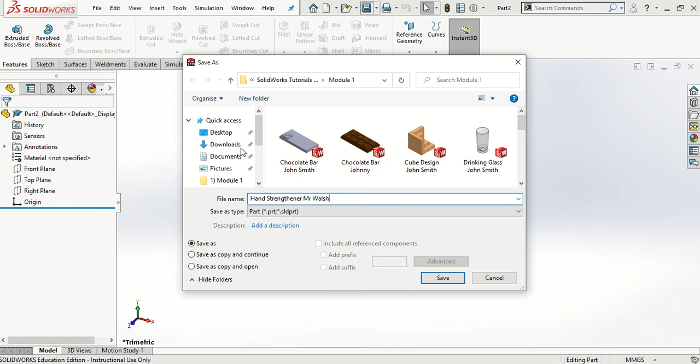We will begin by opening a new part and saving as normal. We're going to call it hand strengthener, and your name. Make sure you're saving it into your folder that you can find it easily again.

First of all, we're going to open up a sketch on the front plane. All we're going to do is draw a normal line starting at the origin off to the right hand side and press escape.

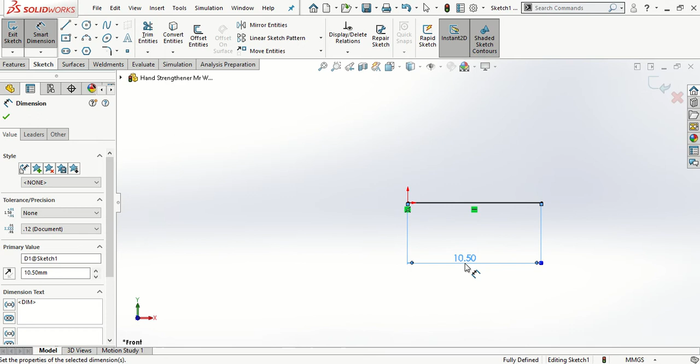We're going to set a dimension on this to 10.5. Then come up here and hit exit sketch. Okay, and then just press escape and that'll knock it off.

See the way the blue is highlighted here and here. If you press escape, that gets rid of that.

We're going to open up a new sketch. It's still going to be on the front plane, so we're going to come down to this arrow beside hand strengthener and hit front plane, and now we're in a sketch on the front plane again.

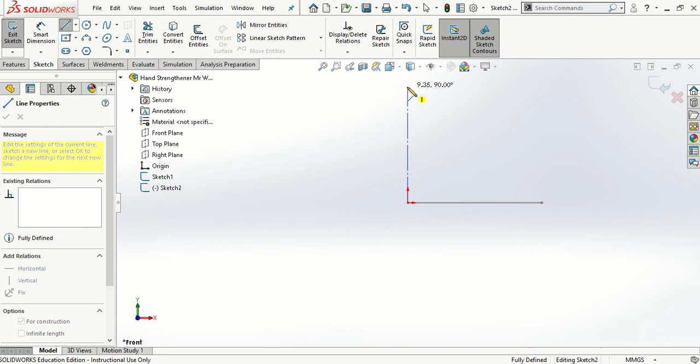We're going to get a center line this time, start it from the origin and draw it up. Somewhere along this center line, we're going to draw a normal circle.

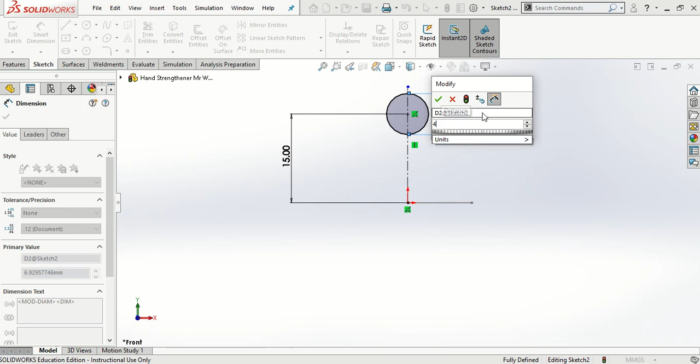We're going to dimension the center of that circle to the origin and set that to 15 mil. Also, we're going to dimension the diameter of that circle to 4 mil. Then hit the green tick over here to the right to exit our sketch, press escape again, and F to fit.

Okay, so that is our setup done. What we'll do now is introduce Swept Boss Base. So what that's going to do is create a helical spiral for us. For anyone in 5th year studying DCG, you will come across helixes and spirals at some stage throughout the first term.

Okay, so we're going to go up to Features and Swept Boss Base. So what is Swept Boss Base? It's going to allow us to create a helical spiral in our SolidWorks.

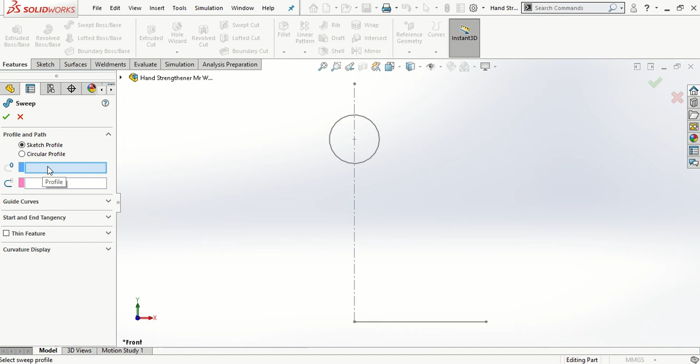So over here we have sketch profile or circular profile. We want this left at sketch profile. If we hover over this, this is our profile, so our profile is the shape we want to take. We wanted to take the shape of our circle, so I'll click on the circle.

If we hover over this, it asks for the path. The path we want to follow is this straight line.

What we need to click on next then is the arrow beside options. We want to leave it at follow path. For profile twist, we want to select specify twist value. And for twist control, we want to change it from degrees to revolutions.

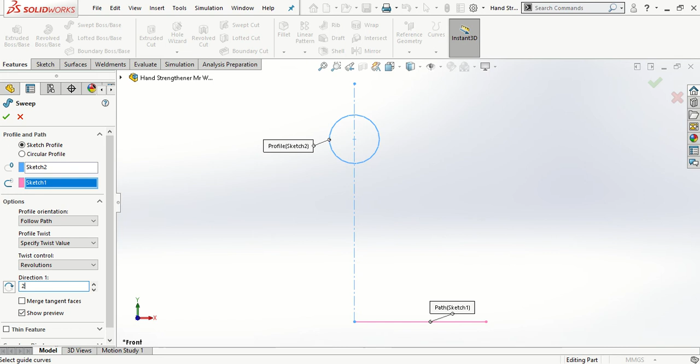Okay, so we're going to change where it says 0 to 2.45. Then click on the blank part of your screen, and you can see we get a preview of what it's going to look like. So that looks like it should, so I'm going to hit the green tick.

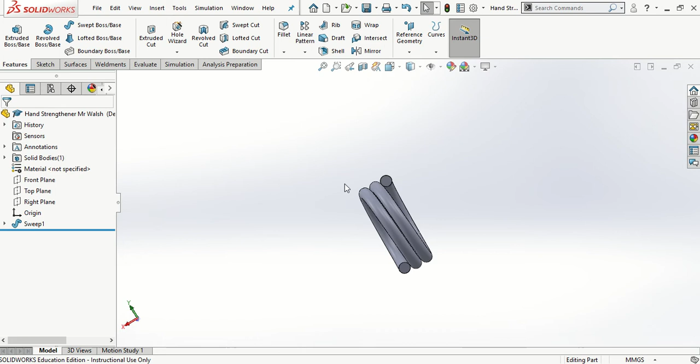Okay, so you can see now we've created a helical spiral from a sketch using Swept Boss Base. So hit save. It's a very, very useful tool for creating what looks to be very, very complicated, but that took us no length of time to do.

So I'm going to rename this sweep to helical part.

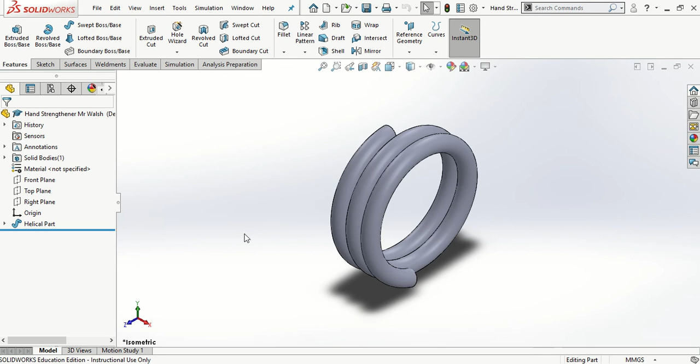So our next move, we're going to rotate around and select one of the faces. So either this face or this face, doesn't matter which one you select first. So hit that and select normal to.

We're going to go to our sketch tab and open a sketch on that face. I'm going to zoom in on it. So as it's turned blue, which is a handy thing to do, and if it's not turned blue on you, if you're after hitting escape or whatever, you can just hit on it again and it'll turn blue again.

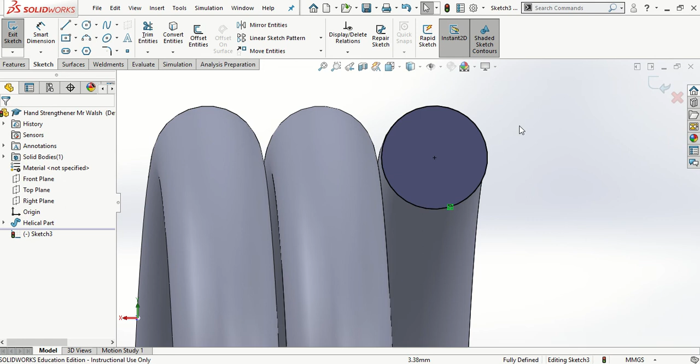So what we're going to do, instead of drawing that circle again, we can just come up here and hit convert entities, and that converts that sketch for us onto that face. Okay, so we can come along then, extrude a boss base.

We're going to set it to 22 mil, and then hit the green tick.

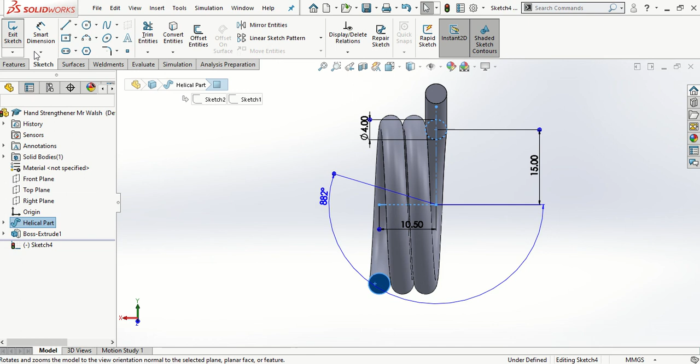Okay, and we're going to do the very same thing on the other end. Hit the face, look normal to, open up the sketch, and convert entities. We'll then go to features, extrude a boss base, 22 mil, and hit the green tick.

Okay, so both those boss extrudes we're going to rename as extension 1 and extension 2. And we'll hit save again.

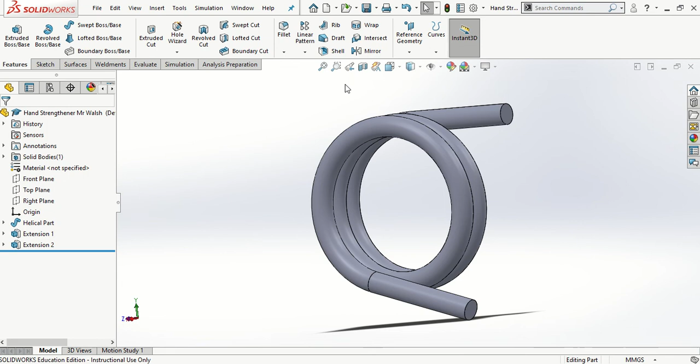So again, we're selecting one of these faces, doesn't matter which one, we're going to be doing the same thing with both of them. Look normal too, zoom in, and open up your sketch.

And what we're going to do this time is select circle, come until we get the center. You see this cross appear when you get to the center. Click once, draw out our circle, and click again.

We're going to dimension that circle to 12 mil.

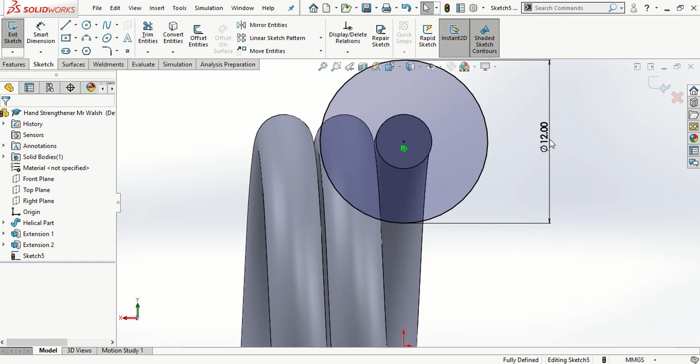We're going to come along then, go to features, extrude a boss base, and extrude that 90 millimeters. So that's what it'll look like, and hit the green tick.

And we'll repeat the exact same procedure on this face. So we're going to look normal to, zoom in, create a new sketch, draw our circle starting at the center of this face.

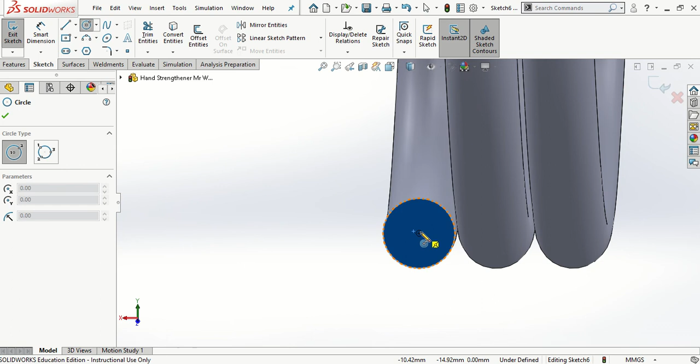Dimension it to 12 mil, and then extrude it to 90 mil.

Okay, so starting to take shape now. And I'm going to rename both of those. One is going to be handle 1, the other is going to be handle 2.

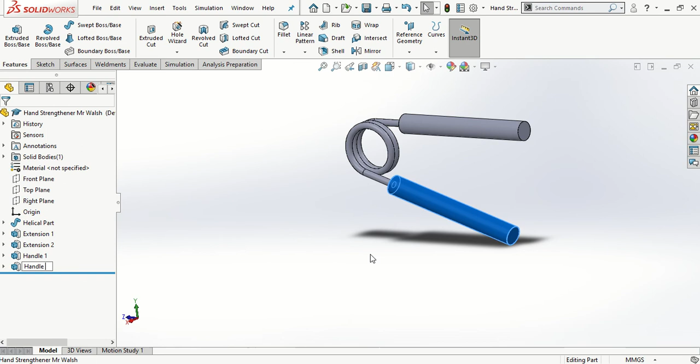So what we're going to do at the end of both of these faces is put a feature on it called a dome. What that does is it slightly rounds the end of the object. Okay, you might have it appearing up here.

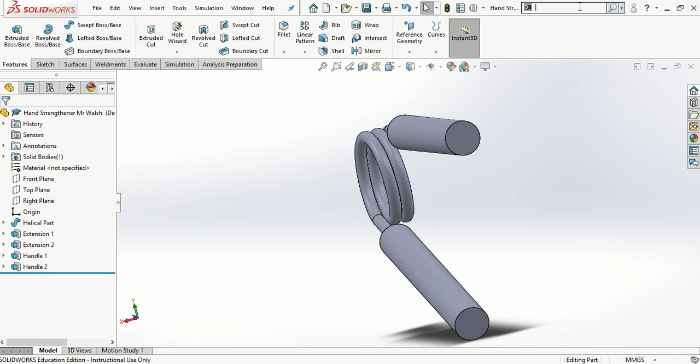If you look in your features tab, click features and have a look here, you might have dome there. But if you're like me and you don't, come up here to where it says search commands. Type in dome, and it'll appear for us.

So if you click that, for the parameters, we're just going to click both faces. Generally it's a bit slow, so you can see that blue wheel spinning around, give it some time. It didn't select it for me, so I'll have to wait. Oh, eventually it picked it. It can be quite slow depending on how quick your computer is.

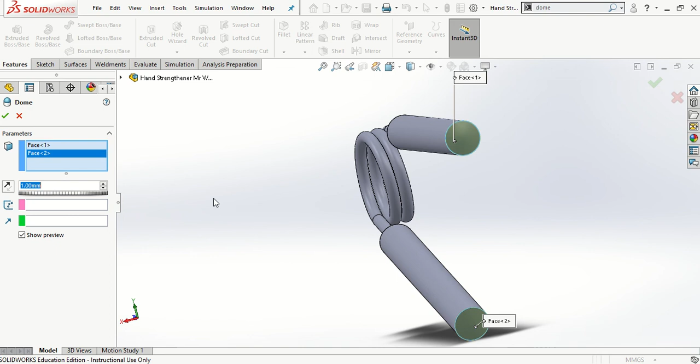So for our dome, I'm going to change the dimensions to 1 mil. That looks a lot better. And hit the green tick.

What we're going to come along next and do is fillet. We're going to change the radius to 1 mil, and we're just going to come along and hit this face here, and this face here, and hit our green tick.

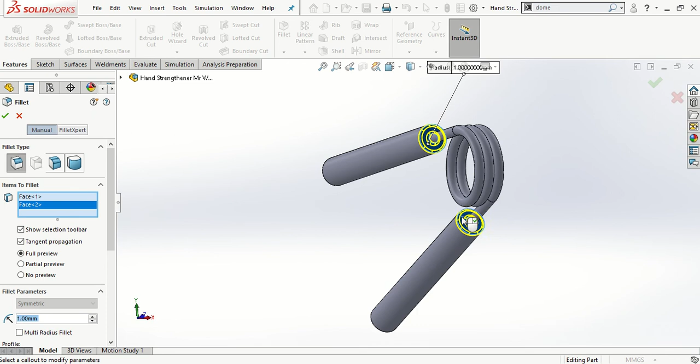So our next job is we need to zoom in, and on this flat face here, we're going to click on that, look normal to, and open a sketch on it.

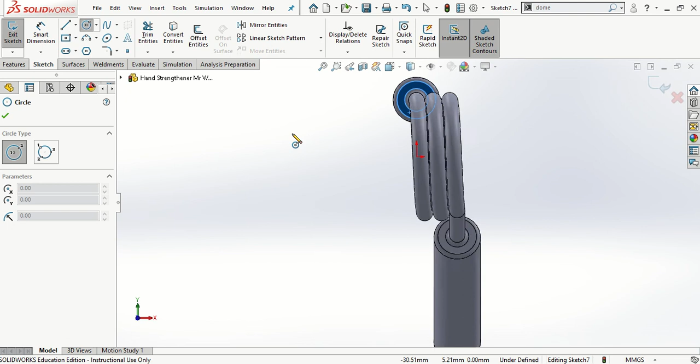What we're going to come along and do is zoom in. I'll start that again. So zoom in, and on the center, that cross will appear on the center. Open up two circles. One to about here, and I'll open up another circle about there.

So I'm going to smart dimension this one to 12 mil, and I will smart dimension this one to 18 mil.

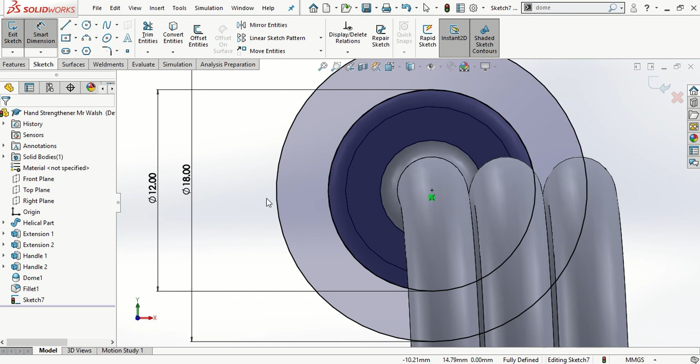What we're going to do with that then is we're going to go to features, extrude a boss base, and at the moment it's facing the wrong direction, it's extruding the wrong way, so I want to come up here and click this arrow and turn it down the other way. That looks the business. We'll leave it at 90 and hit the green tick.

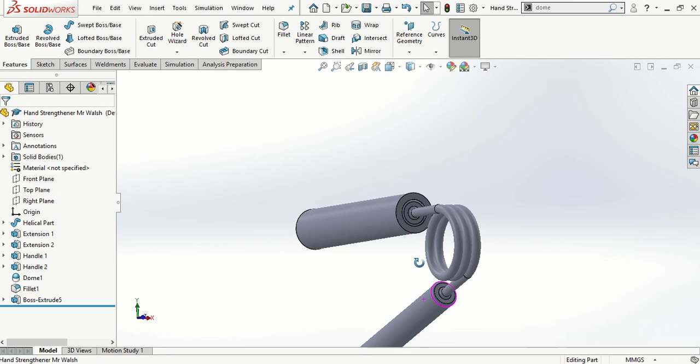And I'm going to do the exact same then on our other face. So I'm going to zoom into the flat part, look normal to, zoom in, hit sketch, and then draw the two circles again. So from the center of that circle where the cross appears, there's my first circle. I can come back in, draw my second circle.

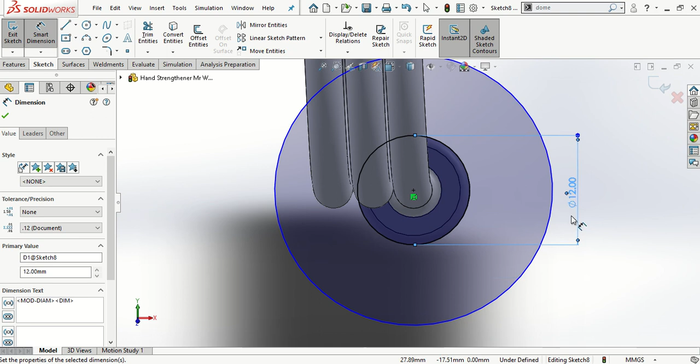Smaller one is going to be 12 mil, and then the bigger one is going to be 18 mil.

So I can go to features, extrude a boss base, and again it's going the wrong direction, so I click this arrow, flips it the other way, leave it at 90 mil, and hit the green tick.

And I'm going to rename that padding 1 and padding 2. And hit the save button.

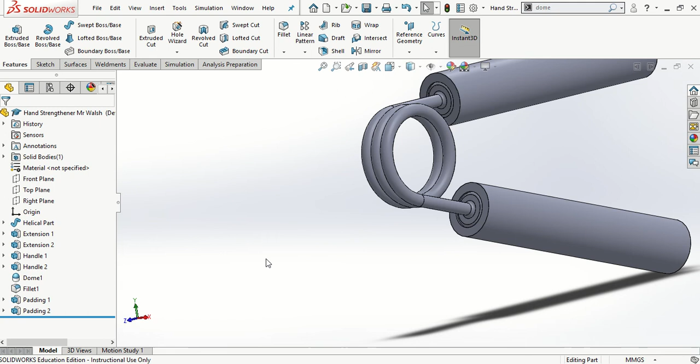Okay, so we have our modeling finished. Now we just need to add materials. So if we went our usual way about it and came over here to materials and added one material to the whole body, that's not actually the reality.

So in reality, this part up here will be made from some type of metal. The padding will be made from maybe leather or some other soft material, and more than likely this part in here will be made from plastic. So what we're going to do is click on the individual parts.

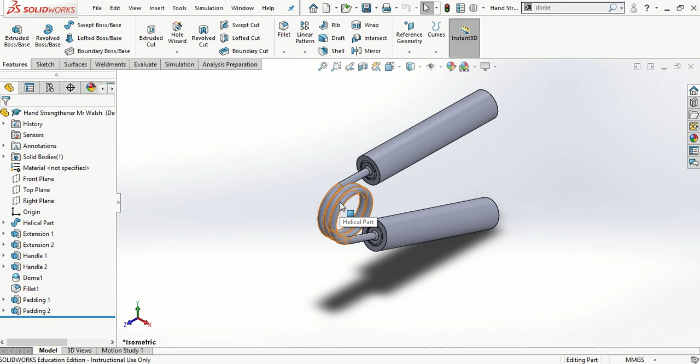So I'm going to right click on the helical part on the top and click on appearances. For appearance I want to hit helical part. Over here to the right then we're getting appearances, so I'm going to hit this drop down arrow and select metal, and I'm going to go for chrome and click chromium plate. As you can see that's changed color.

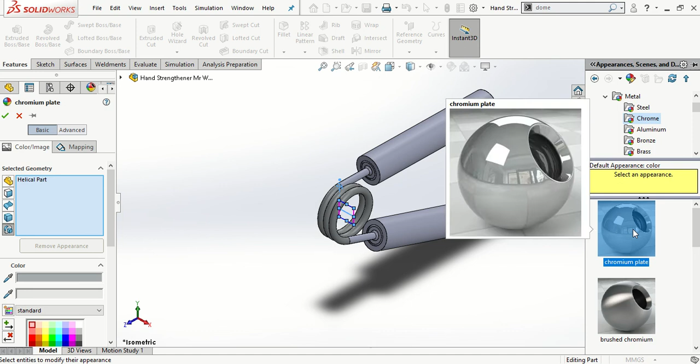I also want these two bits to change to the same color, so if I click on this blue box and then come over and click on both those parts, they'll change color as well, and I can hit the green tick.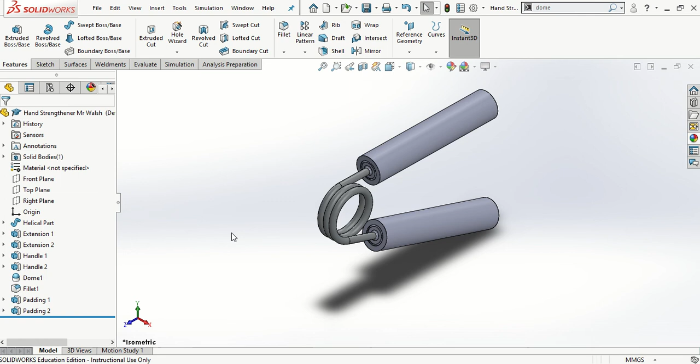So what I'll do next then is right click on the padding, click appearance, and then I'm going to take padding 1.

And I don't want a metal this time, I want to come down and find, maybe it's in organic we will try, or maybe in miscellaneous, there we go. So here's leather, so I want to select leather, click this box, and I also want to select the other padding, so padding 1 and padding 2.

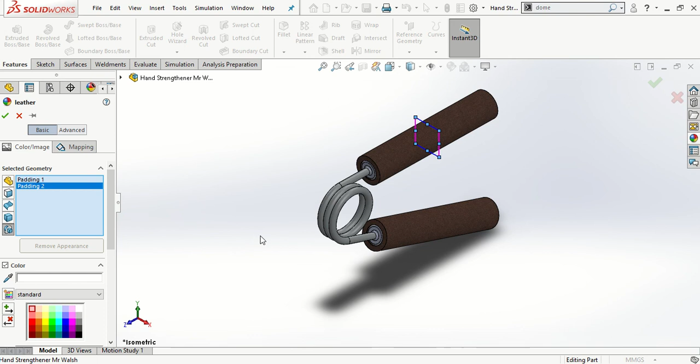Hit the green tick. So then I'd imagine our dome and this part in here will be made from plastic. So if I come along here and right click on the dome, appearances, select dome 1, and select the arrow opposite plastic, and I'm going to select a medium gloss and maybe a light grey.

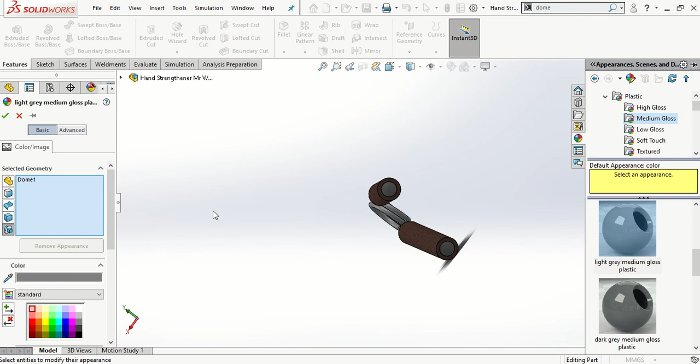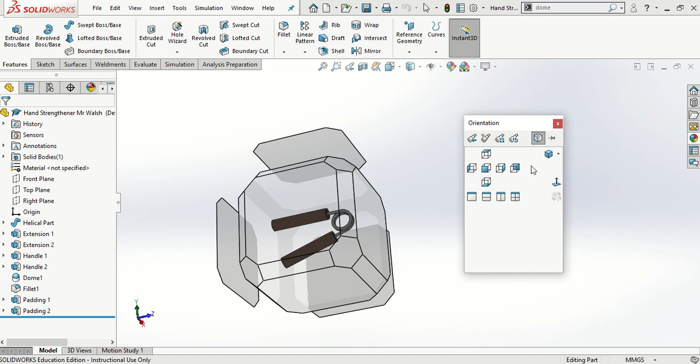So I'll hit save. Looking at an isometric view, and there is our object fully done.